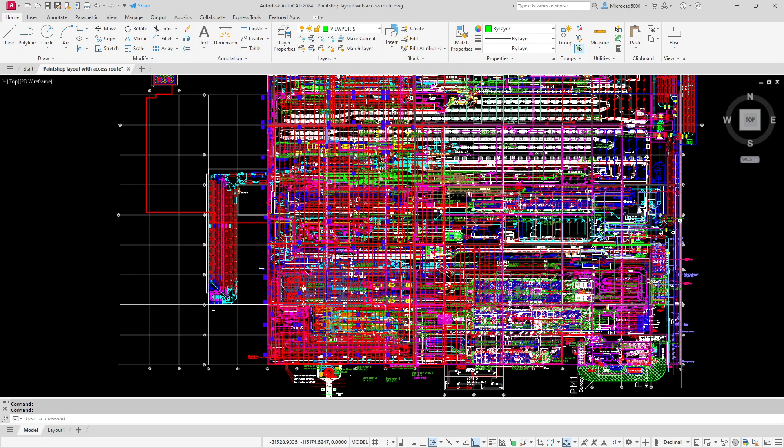I don't know this building myself, but if I did, you can set up an area of the drawing and give it a name. For example, if I zoom in down here, I suspect this is a drive gear for these overhead conveyors. They look like overhead conveyors, and this is a drive gear here. So I could make a named view of this area of the drawing.

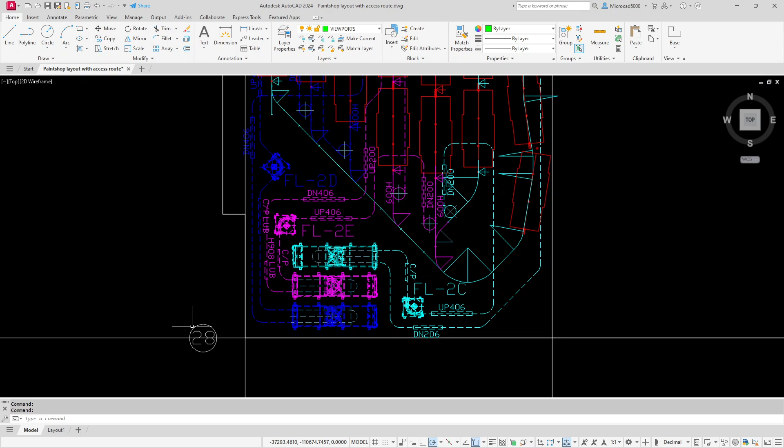To do that, I go to the View tab on the ribbon. There's the View tab, and on the Named Views panel there's a button that says New View. You simply click that button and it pops up with this dialog box, asking you to give the view a name. I'll call it drive gear.

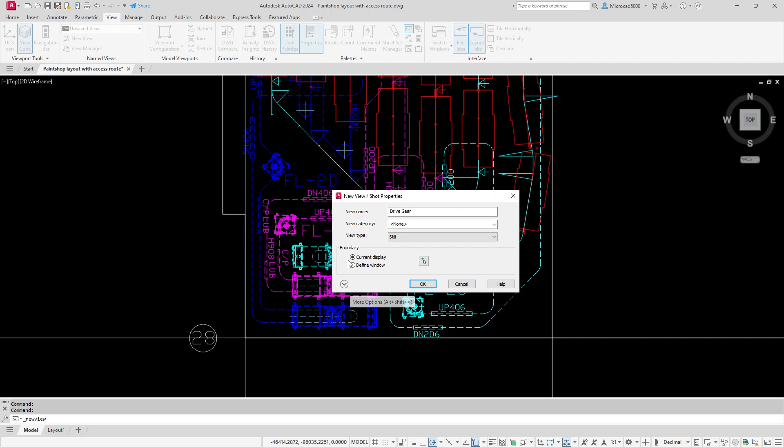Now, the important thing to note here is if I pick the extra options, it will save the current layer settings - save layer snapshot with the view - which is brilliant because you don't have to remember to turn layers on and off when you go to this view. Now I need to tell it the area, so I'll turn these off.

I can't, so I'll use Define Window, and it takes me to the drawing. Now I can click anywhere I want on the drawing file. I'm going to carefully place a box around this area here - that'll do, click. I'm happy with that; that's the area I want called drive gear. Hit enter, it comes back to the dialog box, and you can rename it or change whatever you want. But I'm happy with that, nothing else to change, so I'll click OK.

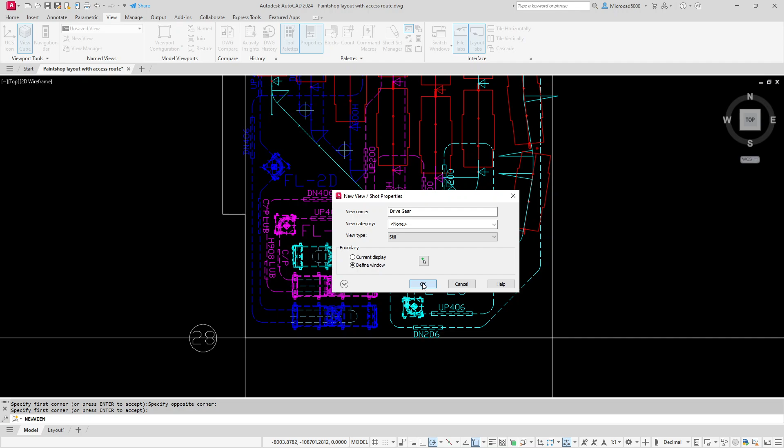Now I have a named view around an area of the drawing. To access that view, I simply come up to where it says Unsaved View, and there it is, drive gear, and it takes me to that area of the drawing. It hasn't turned any layers off, and it hasn't cropped the view or anything like that, so I can double-click my roller to zoom back out and see the whole thing again.

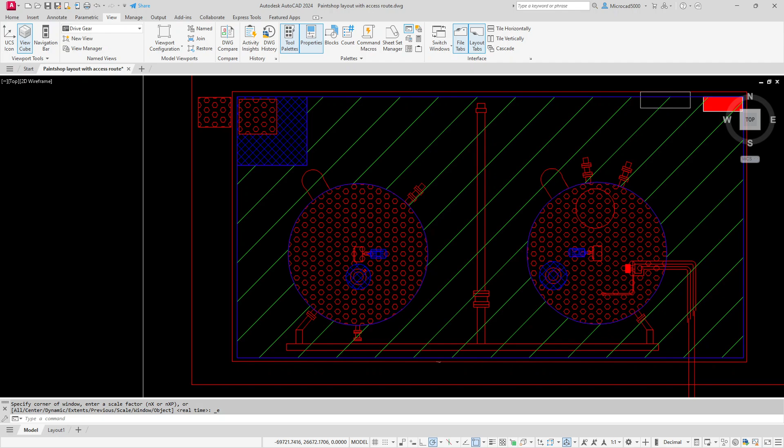So let's make some more named views. If I zoom into this area here, I need to do some work in here - I believe this is a thinner store. I'm just going to freeze this layer, so Home tab, freeze by selecting objects, pick that, and it's turned the hatching off. I might turn this hatching off as well - there it goes. I'll undo that last one though. Okay, so I've turned some layers off there.

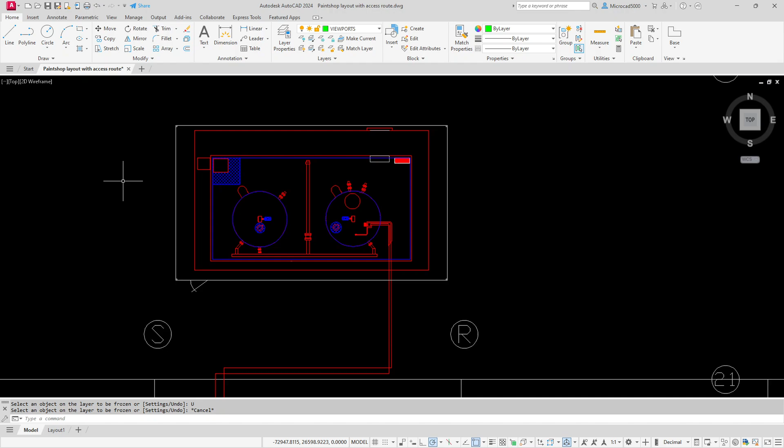So let's make a named view around here. View tab on the ribbon, New View, and type in thinner store.

Define a window and pick a box around the thinners store, just like that. Enter key to finish and OK on that. So I've got a couple of views in there.

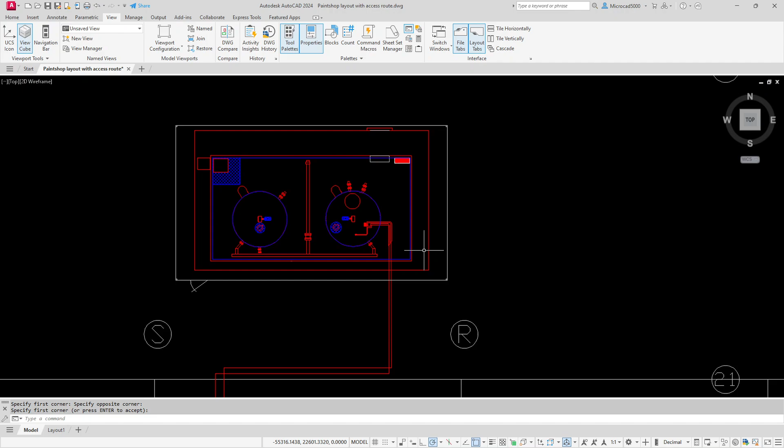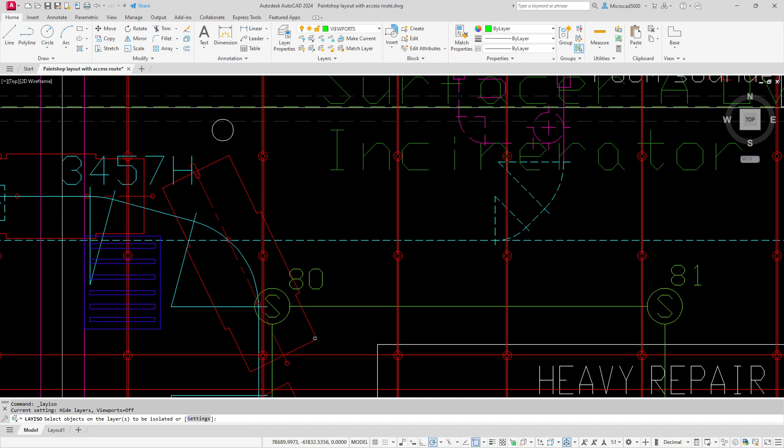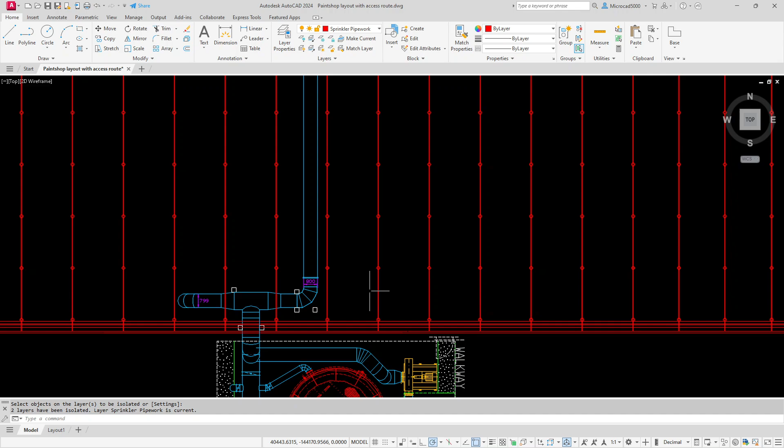Take those dimensions there, I'll take that there, I'll take these things here. Look, and hit the enter key, and there we go. I've isolated the sprinkler pipe work and the duct work and stuff like that.

So double click my roller, that's where I'm going to create a named view. Let's call it sprinkler pipe work and duct work, something like that. So View tab on the ribbon, New View, and call it pipework.

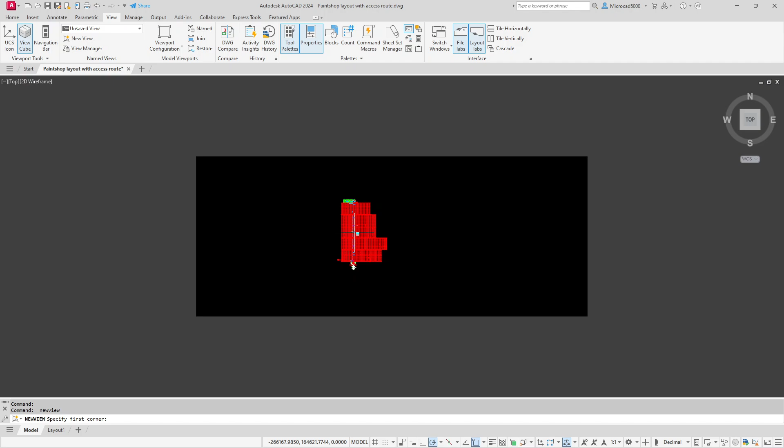Define a window, just put a box around there like that. Make it a bit bigger because more. There we go, hit the enter key and OK on that.

Right, Home tab, unisolate the layers. It brings them all back again.

In fact, why not create a view of the whole drawing called all layers on or something like that? So View tab on the ribbon, New View, all layers on, there we go.

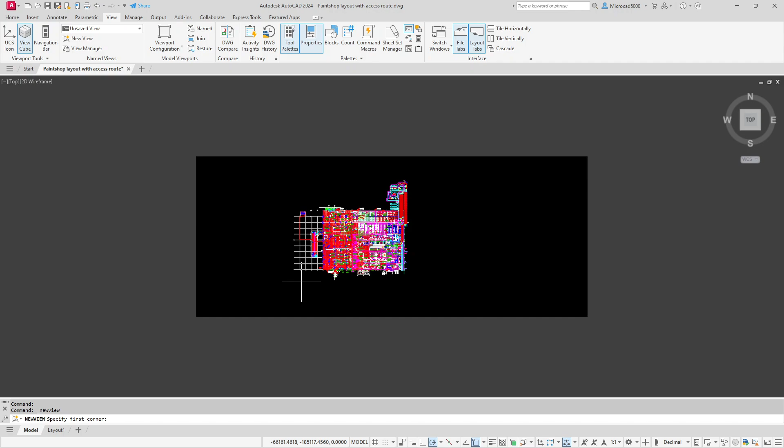Define a window, go around. I'll just pick, what shall I take? Yeah, I'll just take that chunk there. Look, I'll do, and OK. You're getting the principles of it.

Don't forget you could create this. When you're setting up a drawing file, suppose you're an electrical guy, you need to coordinate with the plumbing guy and the HVAC guy as well, don't you? Or vice versa, you need to coordinate between each other.

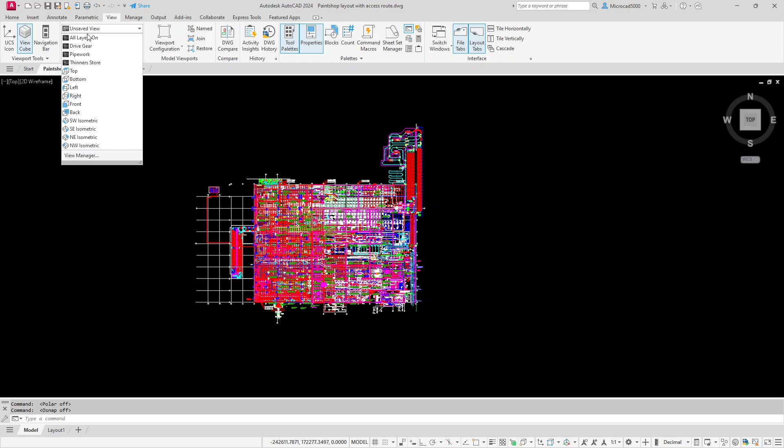Now when you are working, you'll have the other information turned on. So if I come to here, look, and say all layers on, all the layers are on. So I put my pipe work in and such like, I can coordinate with the steel columns and everything else.

When I print the thing out, I don't want to be printing out all that lot. I want to print out just the sprinkler pipe work, for example. So here we go, come back up to here and say, show me the pipe work. There you go, file print.

Show me the drive gear, and there it is. I want to go work in the drive gear, I want to go work in the thinners store. It takes me to those items, and it turns those layers on and off as well.

So when you go and print the drawing out, you haven't got all the other information shown on the screen. Okay, so named views are brilliant for navigating around busy drawings.

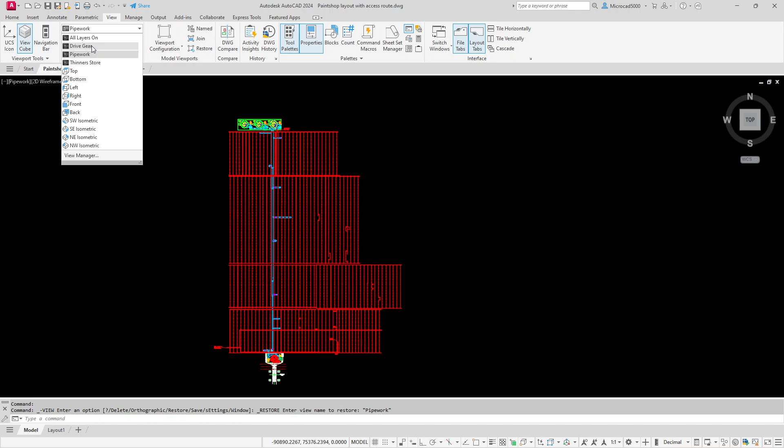Just like that: all layers on, pipe work, as I say, drive gear, and go to the thinners store.

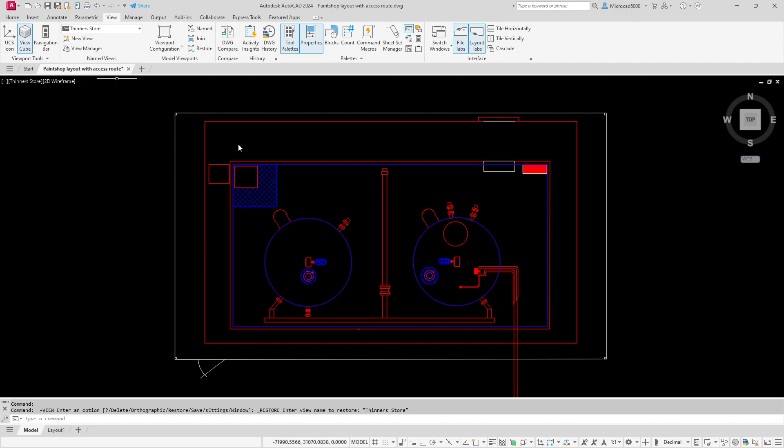Okay, thinners store. So anybody else who picks this drawing file up, if it's the office standard to create named views, house 1, house 2, house 3 or whatever, or you're on a busy drawing, a site plan drawing, anything like that, or on a busy drawing like this one with everything showing, then you can navigate around the drawing file using these named views. So that's the first use of these named views.

Okay, what else can we use them for? Well, these views can be dropped onto a drawing sheet, just like you can in Revit, for those who've used it. Who's used Revit? Now, for those who haven't used Revit, how do you create viewports at the moment?

You probably go to the MView command and pick two corners of a box, then double click inside the box, and you've put it on the wrong layer, so you go back to the viewport, put it on the viewports layer, and then you're zooming in and out, trying to set the viewport scale, and then you've got the wrong layers turned on or off, got to set those up, and then you go to plot it and somebody hasn't locked the viewport and it's not at the right scale, and it's a right chore, isn't it? It's a right chore.

Let me show you named views. In this drawing file, I don't have a drawing sheet at the moment. If this is Joe Bloggs' drawing I've received down the road, it'll probably have his layouts in there, but not mine. So I'm going to pull a layout into this from our standard template. Right-click, from template, and there's our office standard template.

That template has drawing sheets in it. If you highlight it and open it, it shows me the drawing sheets in that template file. I'll bring a couple across, ISO A0 and ISO A1, and OK that. It's pulled our standard sheets across, and there they are. Notice there are no viewports.

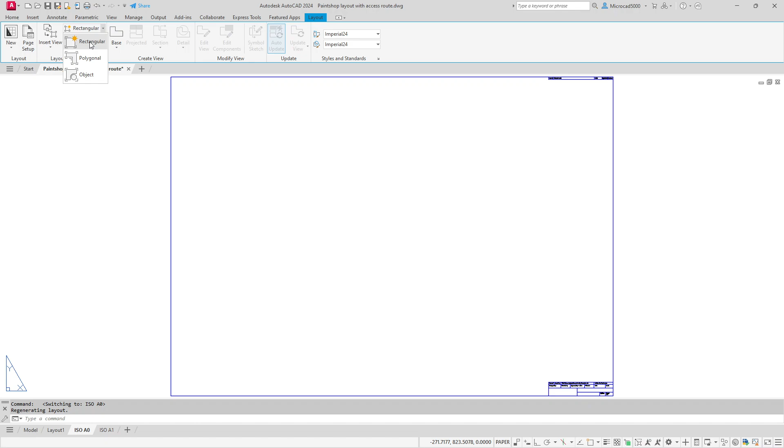On the layout tab, where you'd previously be doing rectangular viewports, picking boxes and zooming out and all that carry on, you simply insert view, there it is, thinners store, click, and bring it onto the drawing sheet. It comes in the wrong size or wrong scale.

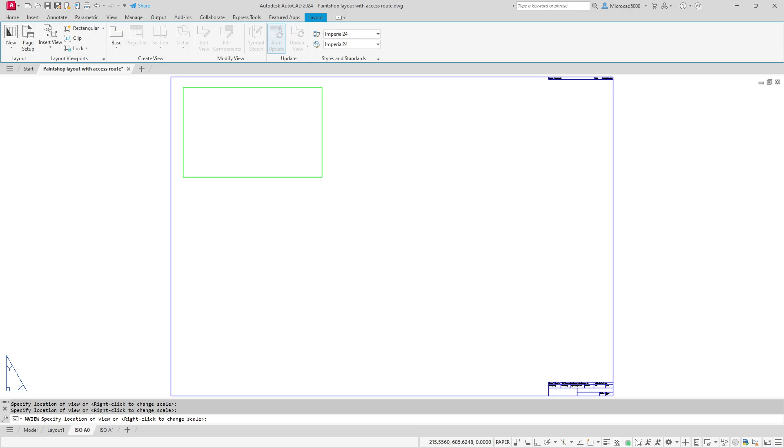Right click and change the scale. Whoops, a bit too big, 1 to 20. Right click, change the scale again. I'll go to 1 to 100. No, I'll leave it at 1 to 50. There we go, I can always change it later on. There is my view of the thinner store with the hatching layers turned off, the right layers turned on and off, at a scale of 1 to 50.

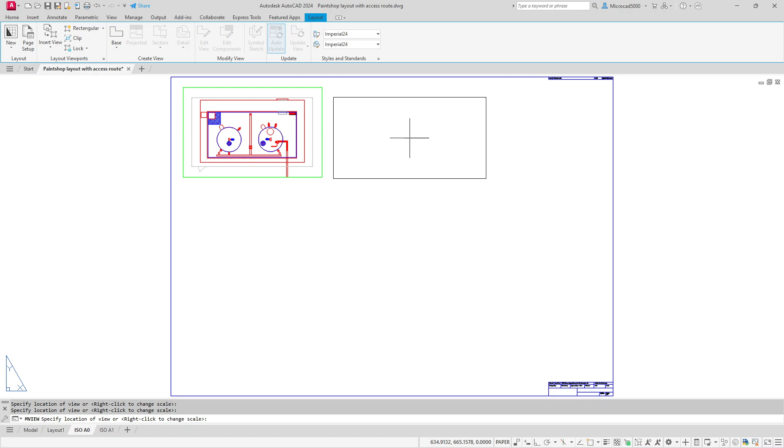Insert view, drive gear. I'll place the drive gear view there. Right click, 1 to 50. I'll make it... no, I'll leave it 1 to 50. There we go, 1 to 50 there. That's the drive gear view.

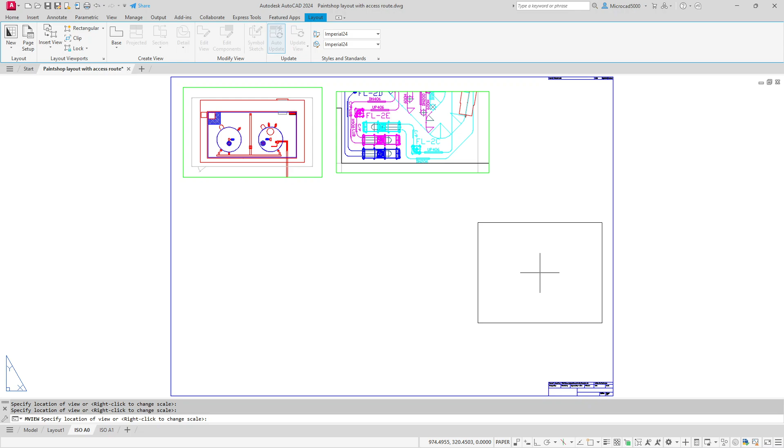That one's sorted. Insert view, pipe work. Right click. Can I get to 1 to 500? I'll go back to 1 to 1000. Ooh, I could tuck that one in there. I'll pop it down there. There's your pipe work and duct work.

Insert view, oh how easy is this? All layers on. Right click, 1 to 500. Ooh, look at that, and pop that one in there. Fantastic, and there we go.

File print, control P to print. Continue, single sheet. You should be able to go straight to a preview. Pull across to this screen here, full preview, bottom left there. And there are my views on the sheet. As simple as that, as simple as that.

Named views, pretty cool, aren't they? Cancel that. Pretty cool. Right, going back to the model tab. So we okay about these named views then? Dead easy, aren't they? Dead easy.

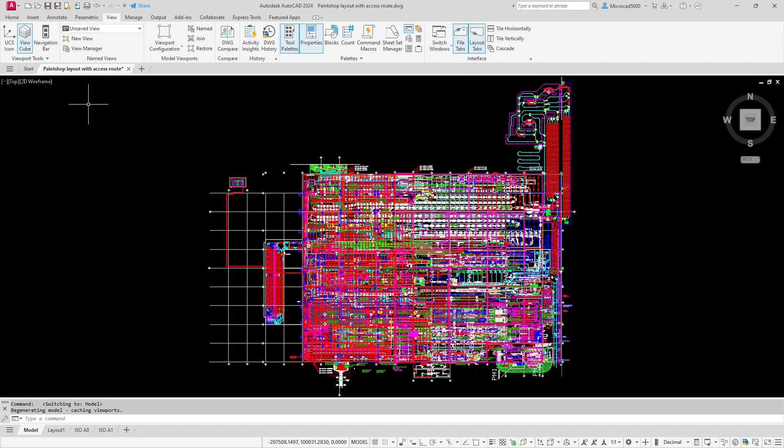So I've just been working on the sprinkler pipe work in this drawing, and then the guy who was doing the electrical stuff and other things in the drawing sent me a revised drawing over. So let's look at the next topic: DWG compare. They've sent me across a new drawing.

They've sent me across Rev A, and here is the Rev A drawing. This is the Rev A drawing that somebody sent me across. So I could be the electrician or the HVAC guy, and the structural engineer or architect sending the Rev A drawing, and I just spent all my time putting all my information into the original drawing. There's the original drawing, and there's the Rev A drawing. Bit of a problem—what's changed? What on earth has changed on that drawing file? I have no idea.

In the later releases of AutoCAD, they brought out this tool called DWG Compare. Okay, so there's my drawing.

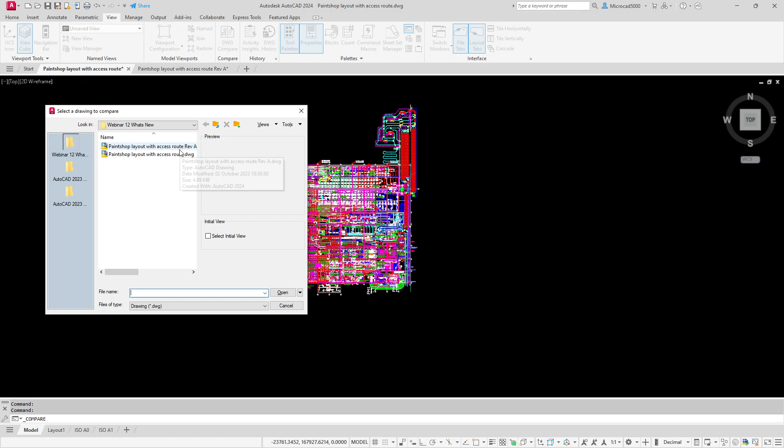Okay, let's compare it with the one that I've just been sent, the Rev A drawing. There's the Rev A drawing. Select it and do an open on that. Let's have a look and see what it flags up.

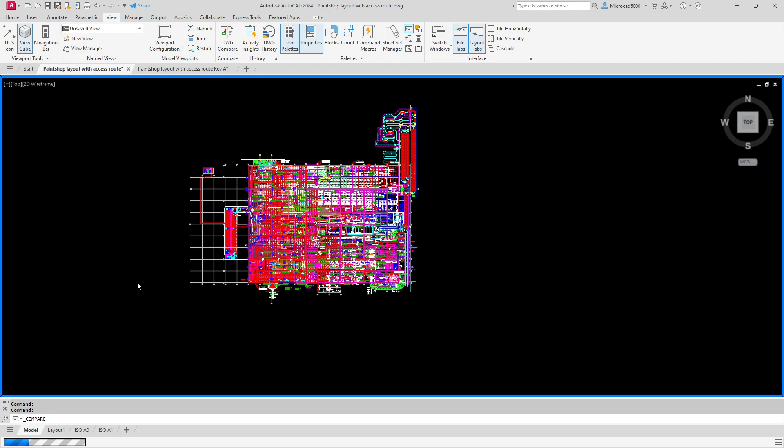It's working through it. Bear in mind, there are tens, if not hundreds of thousands, of objects here, so there's quite a bit for it to work through to see has that changed, has that been added, has that been moved, has that been deleted. And there we go, look.

It's popped up with this information. Let me just change some settings here so I can see things a bit better, the cloud display for example. If I just change it to this, does that show a bit better? Yeah, maybe a bit better there. Right, so if I just pull this across here...

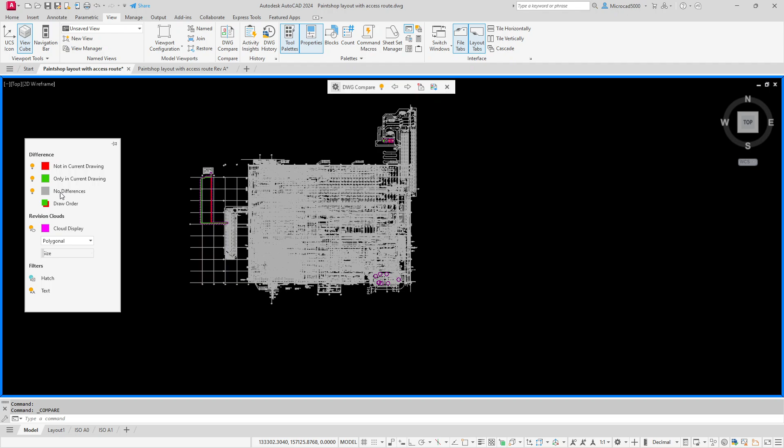If it's red, it's not in my drawing. If it's green, it's not in the Rev A drawing, i.e. only in the current drawing. What is it? And then the other one there is, if it's grey, there's no difference. Blimey. Right, so where is it?

Now if I use these buttons here, look, it'll take me around the changes from one drawing to another drawing. Let's go and zoom in and have a look. Oh, okay. So let's just get that box up again here.

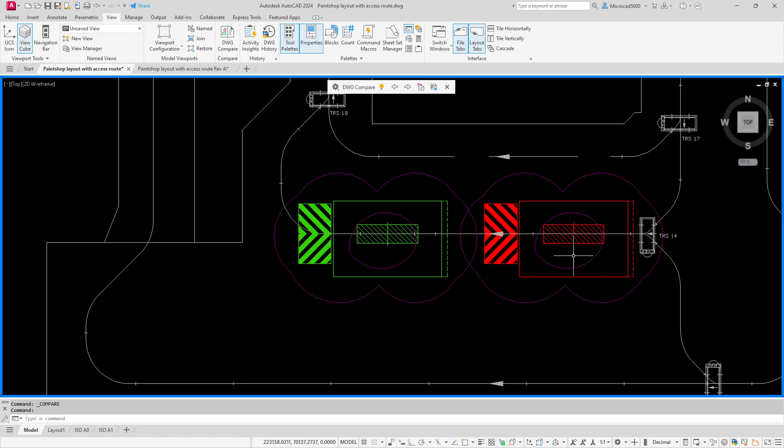So that's where it is in my drawing, and it's been moved in Rev A for whatever reason. Okay, fair enough, yeah, I can live with that. I'll accept that change in Rev A. What else has changed? So that's been moved to there. It was there. Okay, next thing.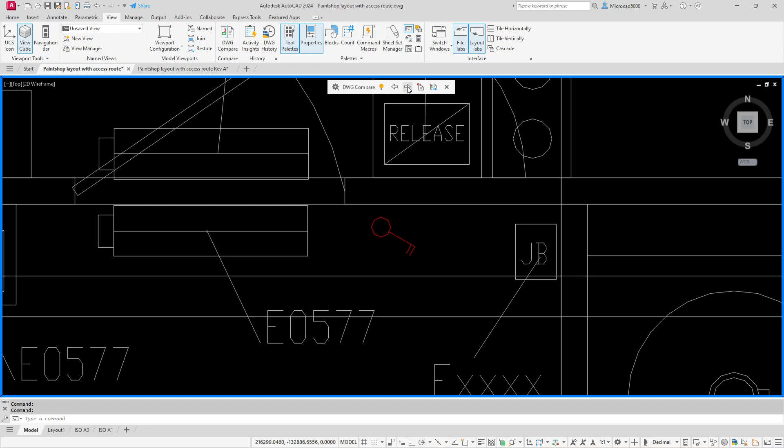Any other changes? I see the spark has been busy. He's put some switches in there, look. He's been putting some switches into that area of the drawing. Let's zoom out and see. So if I zoom out there, yeah, he's been working in the paint mix store there, look, and it's got these bubbles around the changes there.

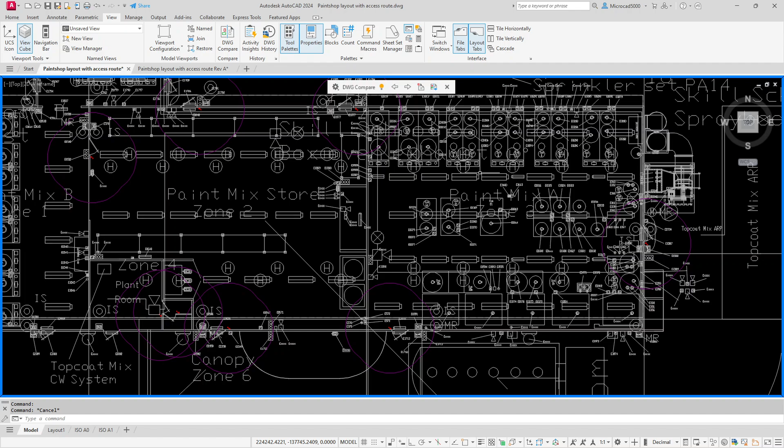Right, okay, so what do we need about that then? So it's told us what the changes are. And I now got the ability here, look, I have the ability here to say import those objects, or the ones I select, into my drawing.

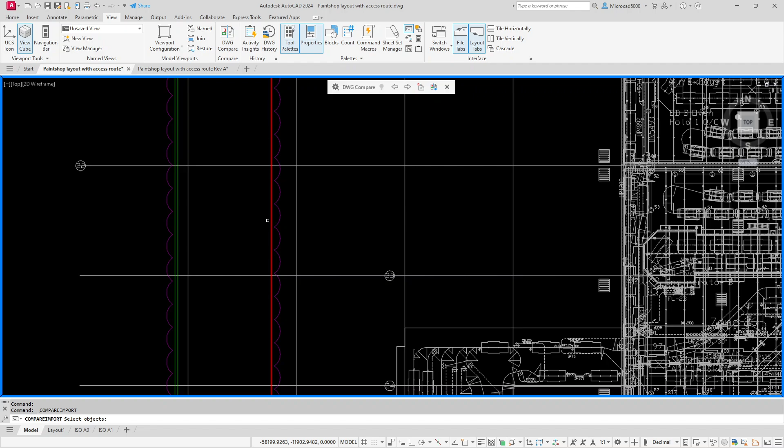So this pipework then, if I say bring in the pipework into my drawing, the command line is saying what do you want to bring in. Well, there we go, I can say bring in that pipework there, this pipework here, and that's it. That's all I need to pull in. So I can update my drawing myself manually, as it were. Press the enter key, and it pulls those across into my drawing.

There we go. And now there's no difference. It's like it's done another compare, look. Those items there now, those vertical lines there, they're in both drawings.

Now, you can bring items in. So I could pull in those switches and sockets from the spark has put into the Rev A across into my drawing now, if I wanted to.

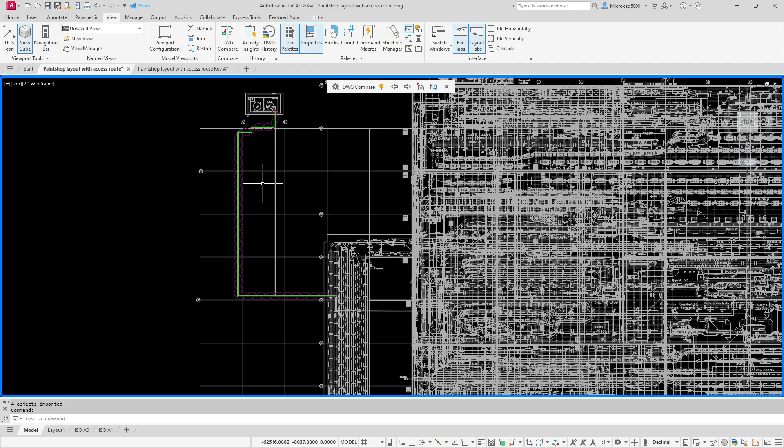Alternatively, we might have a meeting here, have a site meeting about this, because I'm not happy with that. I'm not happy with that. We need to discuss why it was changed, who changed it, and it's got implications for the work I'm doing here. Now, obviously, if I close the compare down, I might miss some of these things when we talk about it in the office.

Now, there's a tool here, look, on the DWG Compare button while we're still in the compare mode. I can create like a hybrid drawing between these two, my original drawing and the Rev A drawing. As it says there, it'll export and bind the results of the comparison into a new sort of hybrid drawing. Let's try that one then. So here we go, bring it over here.

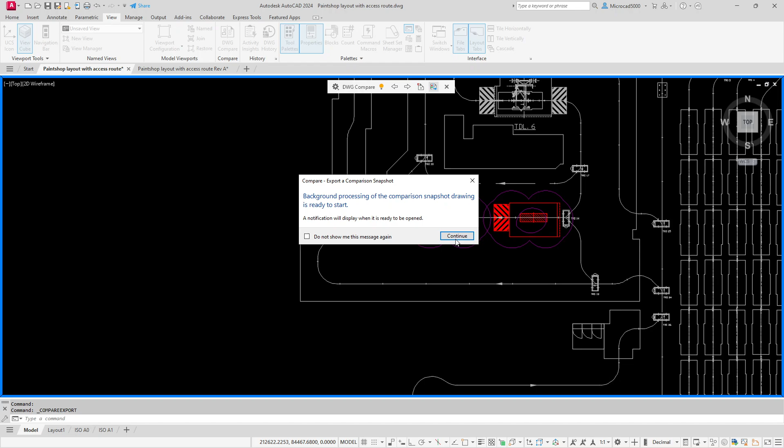So it does a save as, and it does a compare there. Save on that, and just continue on. So what it's doing now is taking both of those drawings and merging them together.

It's telling me it's doing it down here, bottom right of the screen. It's doing this merge between these two drawings. Once it's done, I can close the compare now. There we go.

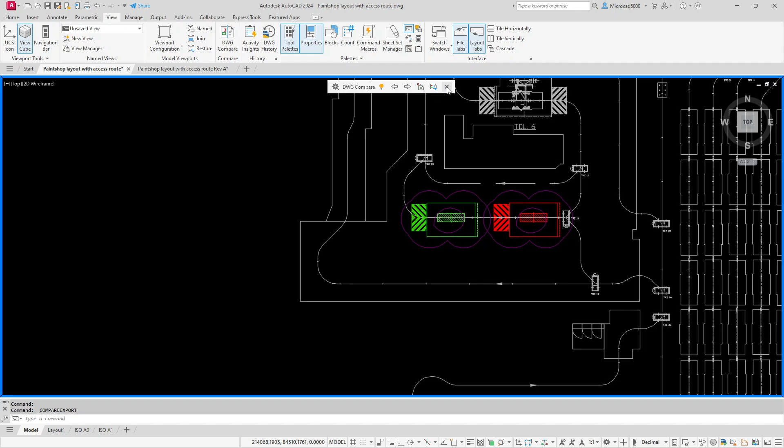So I've closed the compare, and I'm back in my drawing file here, and I can crack on with my work. Now while it's doing that merge, let's have a look and see what happened to the pipework over here. What it's done is pulled in the information from the Rev A drawing, so I can get rid of this over here. I don't need this anymore, because that was only in my drawing, wasn't it?

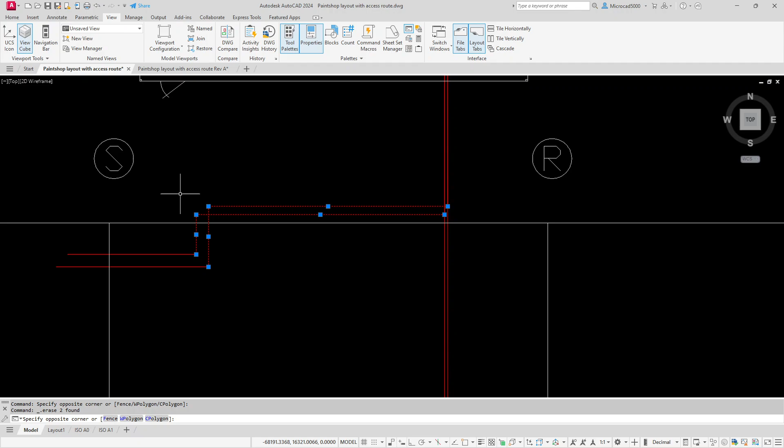So I delete that, there we go. And now it looks like some bit of pipework down here, get rid of that. There we go. So now it's like the Rev A drawing. So I've imported the items across and pulled them into my drawing. Now, I guess I could have windowed the whole lot there and just pulled the whole lot across.

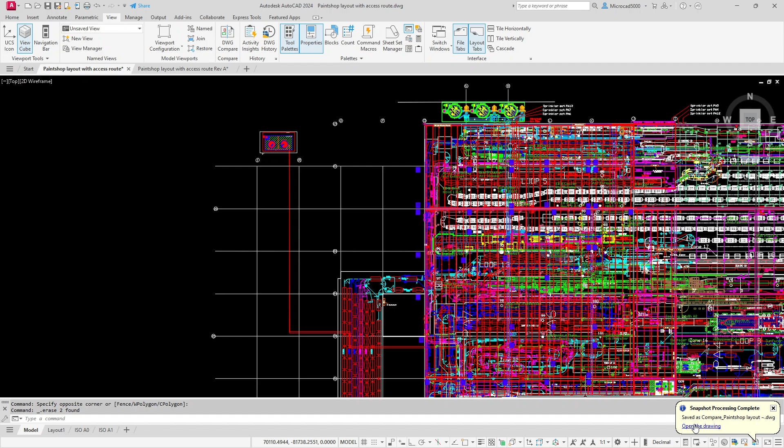So it's finished doing the processing. Let's have a look, open the hybrid drawing. So it's loading the hybrid drawing in now with the changes between our two original drawing files. Okay, that's the message. And there we go, there's our hybrid.

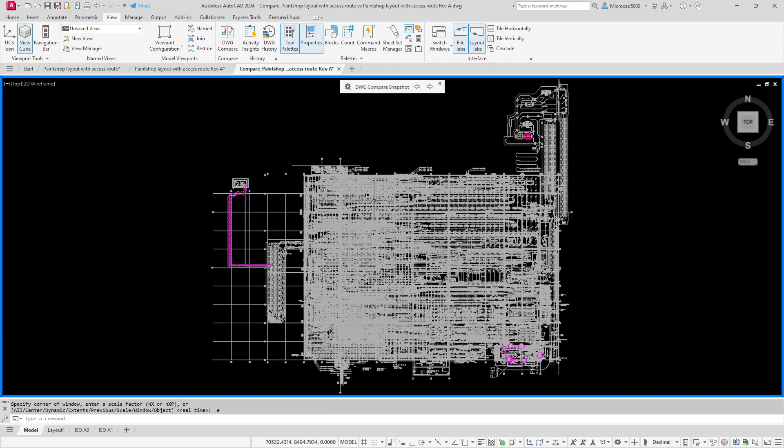If I double click my roller, you can see the majority of it is the same. But I can see that information, don't forget if it's green, it's only in the access route drawing, and if it's red, it's only in the Rev A drawing. Notice that this pipework here is in both drawings now, so it hasn't turned red there.

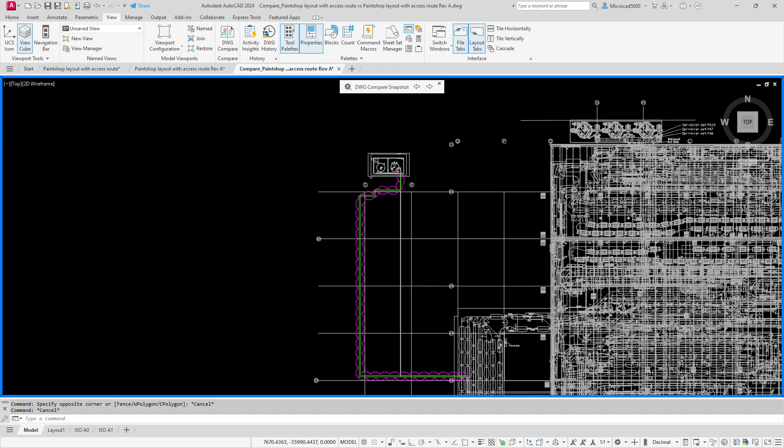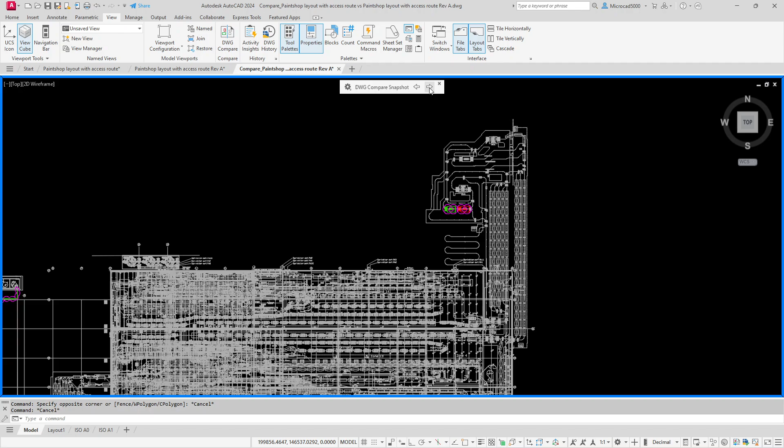But panning across here, if I zoom in here, you see these switches down here, that's the BS standard for a double pole switch. So that's not in my current drawing, it's in the Rev A drawing. And over here, we saw there was some up here, wasn't there? In fact, I could have used these buttons here to move around it. There we go, so I can see there what's in or what's not in both drawings.

So that is the drawing compare routine, which is quite a cool tool there. Okay, so there's my original drawing. There's my Rev A drawing.

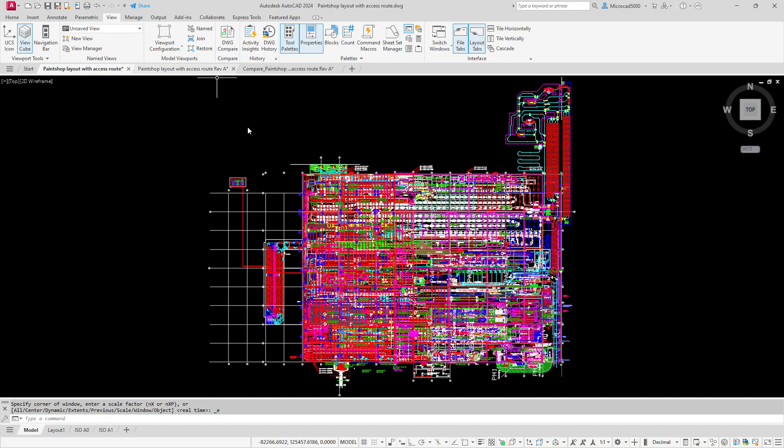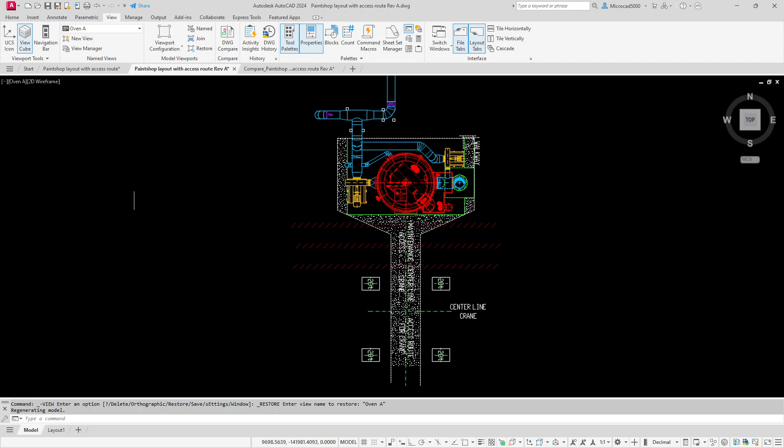And if I have a look in this one, there we go, I've got all layers on. There's a view there, fire protection, all the fire protection information, all your sensors. There's oven A, if you need to go and do some work on oven A. And there's oven B, so this is blowing warm air into the building. There's your sprinkler pipework. There's all layers off, look, and my thinners store.

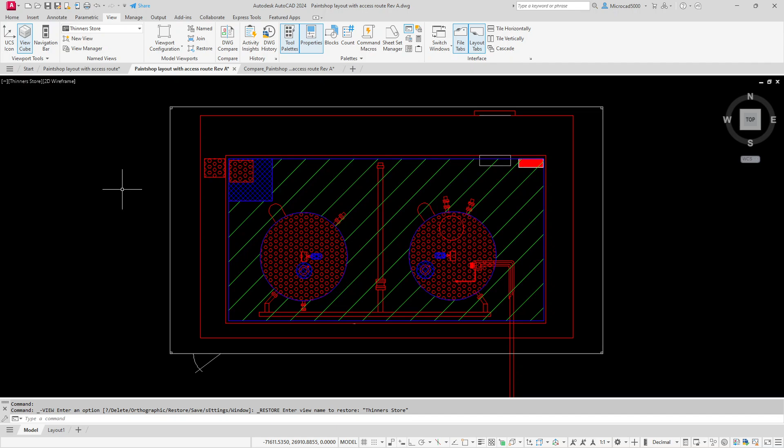Such a useful tool, you can drag and drop those views on the drawing sheet. So there we go, guys, what do you think of that? So that was named views and drawing compare.